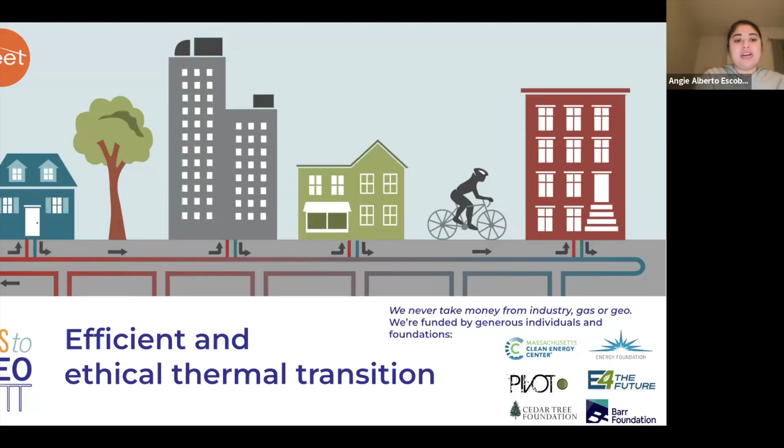I'm happy to share kind of the big picture of why gas to geo, and then some tangible actions that perhaps your community can take, but happy to answer any questions about the Framingham project or any of our work as well.

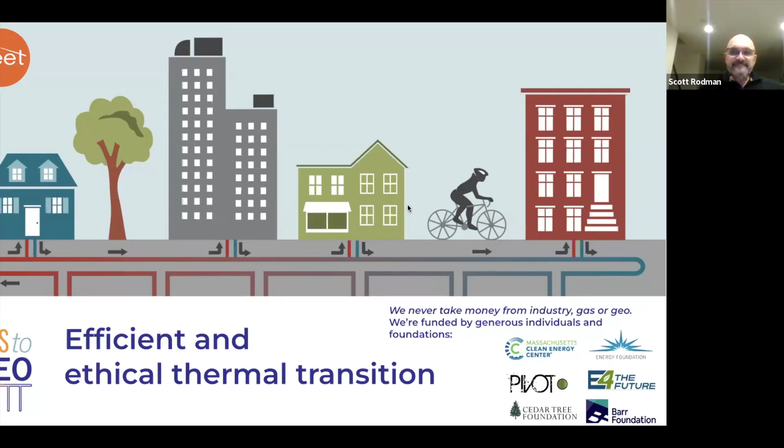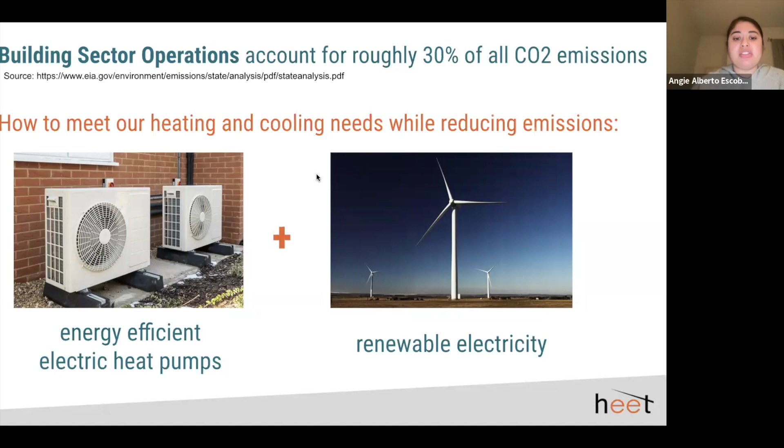So just to set the stage here, it's important to note that our building stock, our current building stock, is a huge source of emissions, and our current strategy for decarbonizing those building sector operations is to meet our heating and cooling needs with electric appliances, and having those electric appliances be supplied by renewable electricity. This is the dominant strategy not just in Massachusetts building electrification or beneficial electrification plans, but even beyond Massachusetts, New York, and other states, you see this as a dominant strategy.

So it begs the question, at least for HEET, what effect will this electrification have on our electric grid and on electric peaks in particular, which drive the cost of energy? So today we have a summer peak in the summer when most people's electric air conditioning appliances come on. But what will the peak look like when we shift our currently fossil fuel powered heating systems over to electricity? And so that's the question that HEET started exploring.

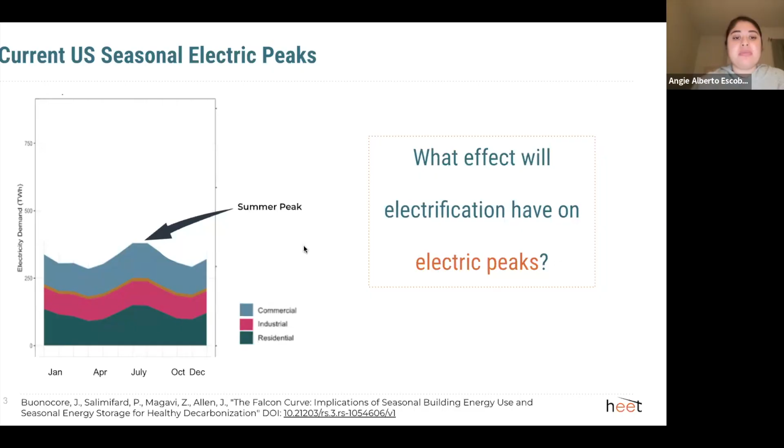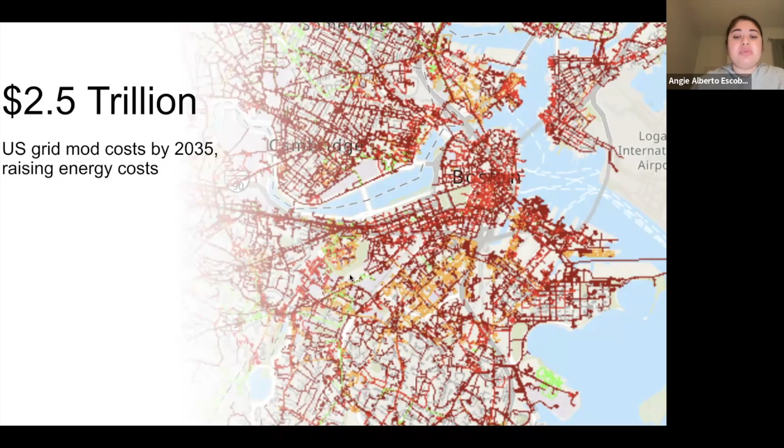This is a staggering number, $2.5 trillion in the next 10 years just to upgrade or modernize our grid in the US. This reflects back in ratepayer energy bills, right? Like we are funding these investments in the electric grid. And so we see this as a staggering societal problem, the amount of investment required in order to meet folks' energy needs and what that will mean for people's everyday affordability, energy affordability.

This report was published in December of 2023 by Oak Ridge National Lab. It showed that compared to the most popular technology for building electrification, air source heat pumps, when you compare a mass deployment strategy of air source heat pumps electrifying a vast majority of our building stock in the US, to ground source heat pumps serving the same function, you can actually save not just lots of infrastructure upgrades on our electric system on the transmission and distribution side, but that translates to real cost savings as well. If you go with a low operational energy technology like a ground source heat pump that has a significantly higher coefficient of performance, this study showed that it would cost 30% less to decarbonize the grid through individual ground source heat pumps, which is incredible and something to pay attention to.

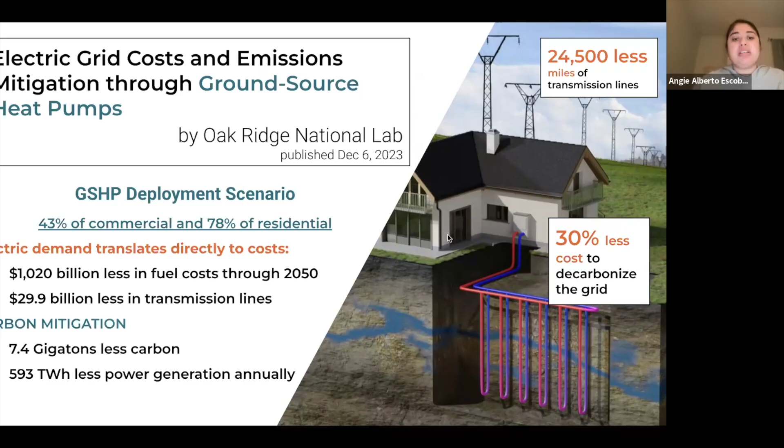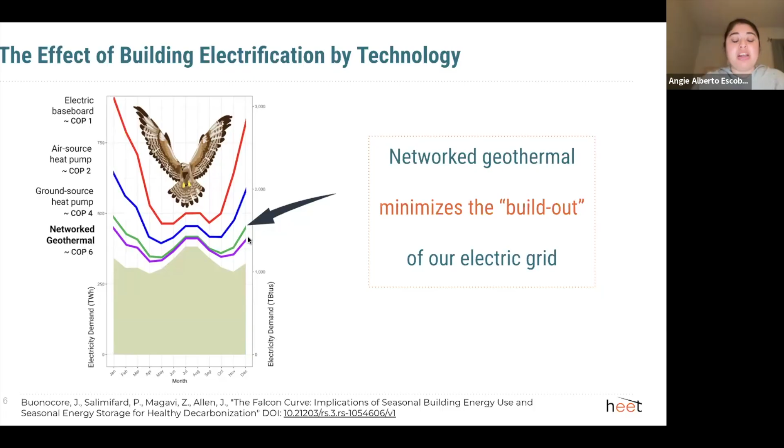As you see, COP, or coefficient of performance, essentially the efficiency of the technology increases. Air source heat pumps have a COP of 2, ground source heat pumps have a COP of 4. As that COP increases, that peak starts to lower, the wings of the Falcon start to lower. A case study in Colorado gave us a COP for a networked geothermal system, or a networked ground source heat pump system, with a COP around 6. And so that could decrease the amount of infrastructure and really minimize the amount we need to build if this were the dominant technology used to electrify our buildings.

So the message I really want to drive home here is that efficiency of the technologies we use, especially electric technologies and electric appliances, really does matter. Efficiency matters. At the same time, related to our work in methane, we and most climate advocates know that methane is an incredibly potent greenhouse gas.

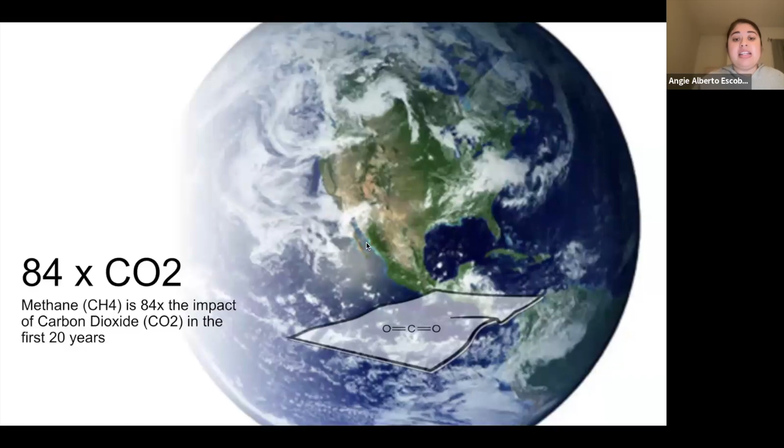In our state, this is the amount of infrastructure work that is required over the span of 5 years, from 2022 to 2027. This is a snapshot of the infrastructure work due to the leaky, aging gas system that exists in Massachusetts, which is frankly just aging. We're aging out our infrastructure, and it's going to cost us $1.4 trillion by 2050, according to a research economist, Dorie Seavey, who ran the numbers.

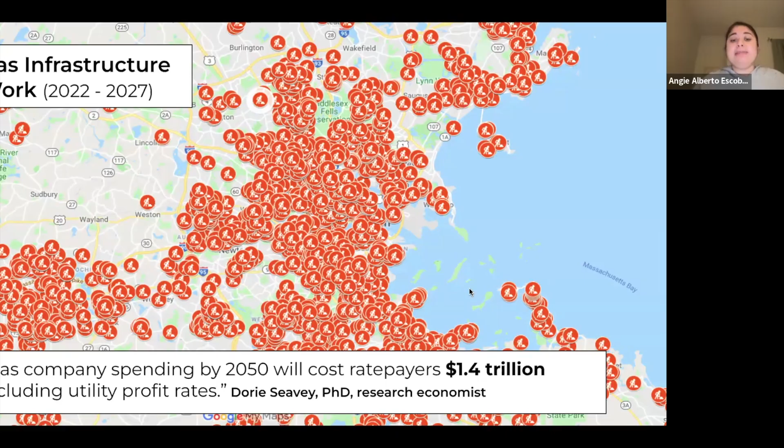And we know that these gas leaks, no matter how big, the biggest ones are the ones to target first. That's some work we've been doing. You can check out our gas leaks maps on our HEET website. Those are the ones to target first, but really all of these leaks in aggregate are contributing to climate change. We need to find a way to have plug-and-play solutions that can wean us off the gas system, so that we have less dependence and can minimize gas leaks in the future and minimize the amount of methane in the atmosphere.

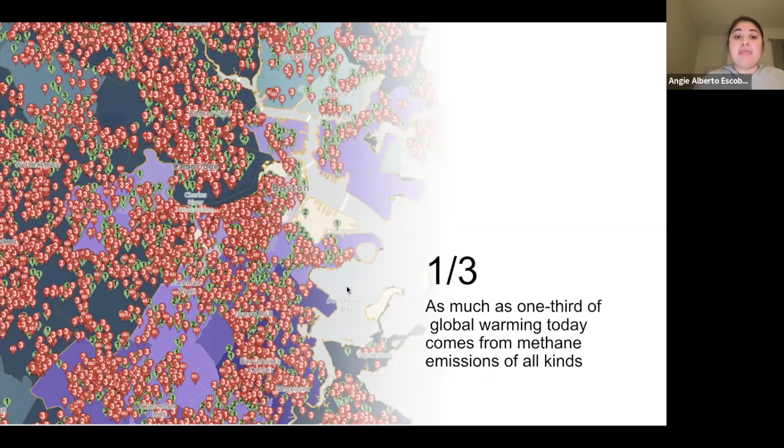So as we're investing millions of dollars in our gas system, people are still electrifying. People are leaving the gas system actively. If you take a look at this figure on the right, air source heat pumps have outsold gas furnaces and continue to outpace the sale of gas furnaces, which results in a house-by-house approach to electrification, right? What some folks may call an unmanaged electrification strategy.

We don't know when people are making these decisions. They just are—they decide one day, or their current system ages out and they have to replace it. But there is no coordinated effort necessarily to this electrification. It's really a house-by-house approach.

And the challenge here is who is left on the gas system with a decreasing rate base are likely folks that are renters and don't have a say on what type of heating system they have in their home, or are low-income folks who just have to go with the cheapest option, or maybe just aren't informed about the options that exist for retrofitting a home to be electrified. So this is really a big challenge in our energy transition—ensuring that as we're transitioning, it is equitable and we're not leaving folks behind in what we call the last grandma problem.

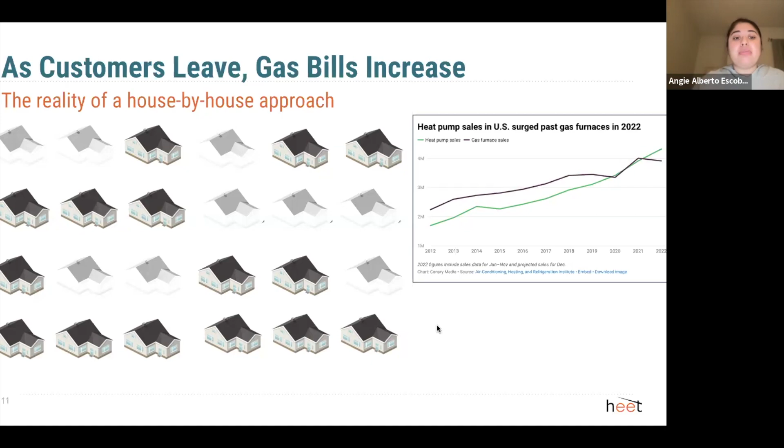So through these challenges that we've mapped out, HEET engaged with many stakeholders on the challenges and came up with this possible solution. What if we use the right of way that the gas system currently has, use the expertise of laying pipe in the street, and simply change the energy transfer medium from gas to water.

And so a geothermal network is very similar to the gas system. It has a distribution pipe that runs down the right of way of the street, and service lines that go to each building. And kind of like the gas system, where you have a gas furnace in your home, you would have a heat pump in your home that is supplied with water from this distribution loop. And so this is what we call a geothermal network.

It's a solution that came together over many charrettes, what we call community charrettes or stakeholder meetings, to help find a solution or technology that can multi-solve for many of these societal problems we're seeing. So this system is a closed loop system, so it doesn't have any contamination issues. Usually the energy transfer medium is plain water with some glycol or antifreeze in it. The percentage changes depending on who is engineering the system and how comfortable they are with having minimal amounts of glycol, but it's a very environmentally friendly material used within the pipes, and it is a closed system.

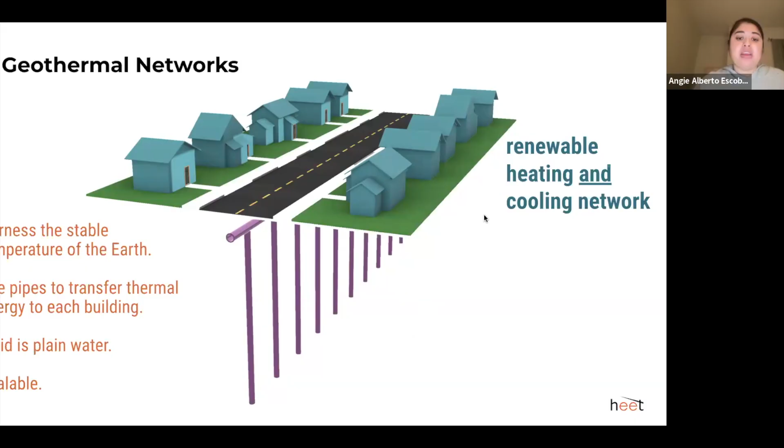And this system would provide renewable heating and cooling, and require a minimal amount of electricity. So what HEET has proposed, in order to maintain a stable rate base and not leave folks behind, is: what if a gas utility—with the expertise of putting pipe in the street, managing thermal energy, having that customer relationship already, that billing relationship, and that long-standing trust of being able to supply them with their energy needs—what if those utilities were to install these systems and provide energy across an entire neighborhood, renewable thermal across an entire neighborhood at a time, no matter the income level or whether they're renters or owners, but just provide thermal service down a cul-de-sac, let's say.

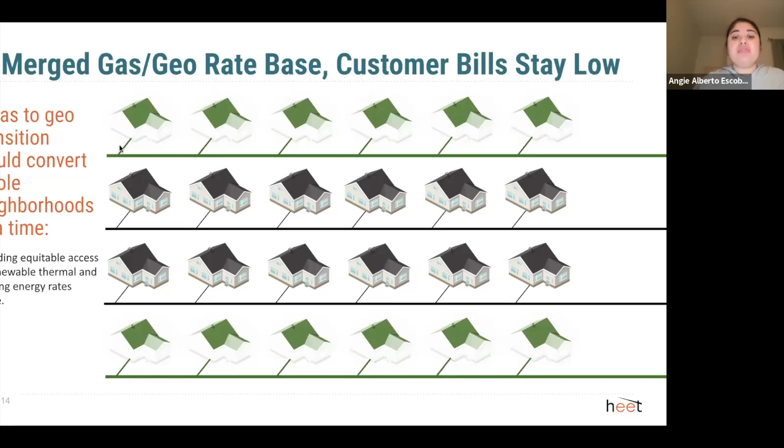So I wanted to clarify when I say geothermal network that folks aren't thinking of other geothermal technologies, because this is a very common misconception. We're not talking about a deep geo district that uses hot water, brings it up to a central plant, and distributes the appropriate temperature around a hot water loop. That is very common in Europe, Scandinavia, places where they have really high heating loads. This makes a lot of sense, but there are a lot of efficiency losses along the system when using that temperature. We're also not talking about geopower, or geothermal for electricity, which goes even deeper and produces extremely high temperatures that turn a turbine to produce electricity.

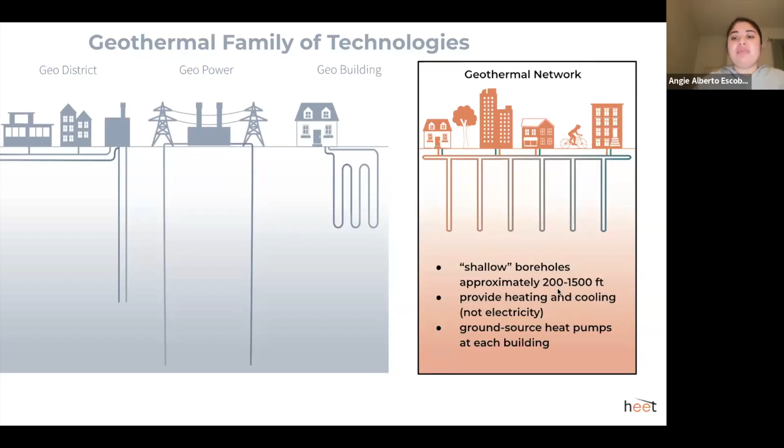What we're talking about is closer to just an individual building with a geothermal system, or a ground source heat pump at the building with some sort of geo exchange underground or in a pond in their backyard. We're talking closer to this technology, except the infrastructure is in a shared location along the distribution loop, and there is a distribution loop connecting buildings to each other. So this is considered shallow geothermal—only up to around 1,500 feet is really the deepest you'll go for a geothermal exchange system like this. This does not provide electricity; actually you're using electricity at the building level, but it's highly efficient, and I'll tell you why.

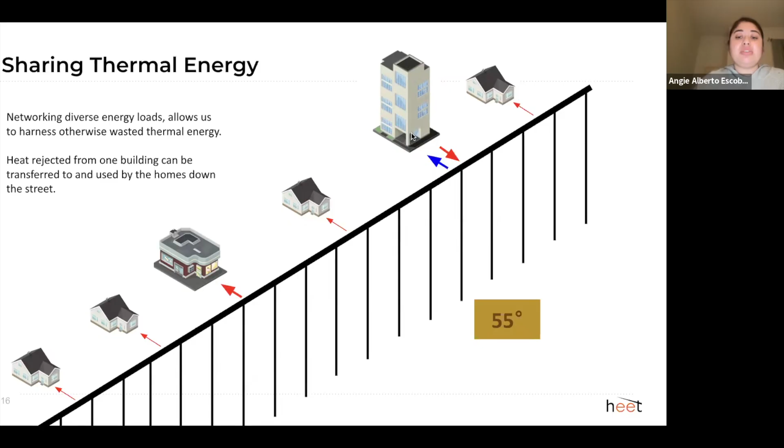So this shared loop—people sometimes ask why even install it, why not just do individual geothermal? Well, there are interesting properties when you put in this shared loop that make the economics worth it. When you target a location with mixed energy use, there might be a building that, even in winter, because of its occupancy and machines, might still need to be cooled. The ambient temperature loop can harness the waste heat from that heat pump: as it's cooling the building, it rejects heat, pulling it out and placing it into this shared loop. That loop, which also has service lines to other buildings, can then supply that warmer temperature—likely closer to what those buildings want in winter—making the heat pump work more efficiently and minimizing energy costs for folks on the loop. And if those folks were compensated for that waste heat, they could benefit from this too.

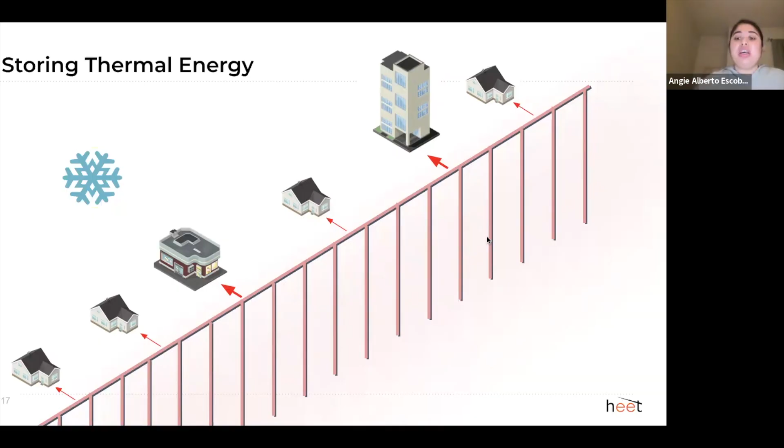With geothermal bores, these vertical loops pictured here—in Massachusetts we have great bedrock, which holds a lot of heat, so we can actually store thermal energy across seasons. Say in the summer, we can dump our heat into the ground and pull it out in the winter. This is true over an annual scale, but also over smaller time scales, allowing you to store energy across the year—think of the shoulder seasons.

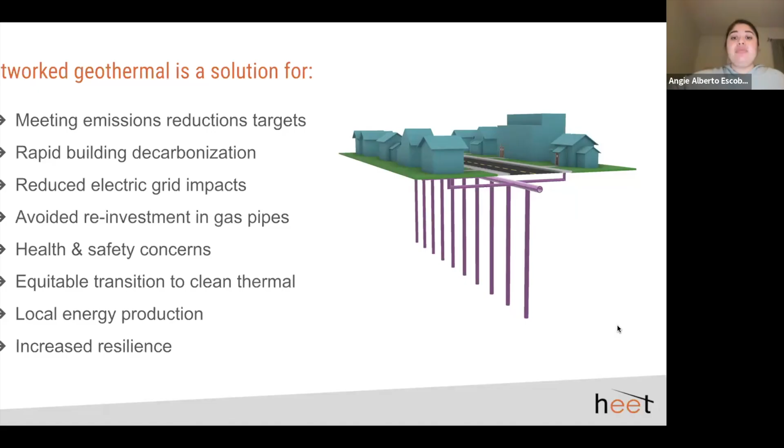So really, HEET has been exploring and advocating for this technology because of its ability to multi-solve: meeting emissions reduction targets on a neighborhood or block-by-block basis rather than house by house, increasing the speed at which we meet these targets, and also because of the amazing electric grid impact of ground source heat pumps, as we saw with the Oak Ridge National Lab study. It's a great plug-and-play solution for avoiding investments in natural gas pipelines, because these systems can deliver the exact same thermal service, but can now also supply an additional thermal service—cooling in the summer—expanding the business model of the existing gas utility. By reducing combustion in homes, health and safety could increase with the decommissioning of gas, and for the reasons of equity I mentioned, it's also local energy production—hyper-local. You have the bores or local thermal sources right around your neighborhood. That's the idea: harnessing what's already around us for increased resilience, so we're not depending on fuel shipped from far away.

And so I want to mention that this is kind of the progress to date. There's a lot of utility interest across the nation. There is a quarterly utility network geothermal collaborative that meets to explore the topic, that we're active participants in.

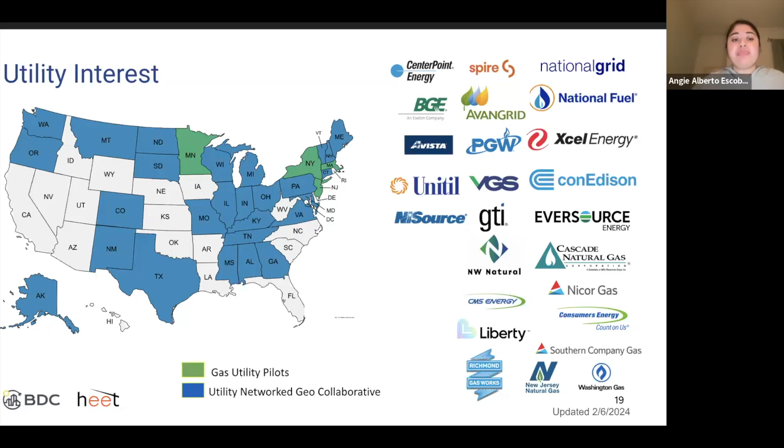The reason that drove us towards the gas utility, besides needing to solve for the gas system issue in Massachusetts, is because of an additional equity concern, which is a just transition for the gas workers currently. They are necessary, they are vital to steward us away from the gas system. There's so much institutional knowledge within the gas workforce that are actually out there repairing pipe, putting pipe down, that will be necessary in order to steward us into a clean energy future.

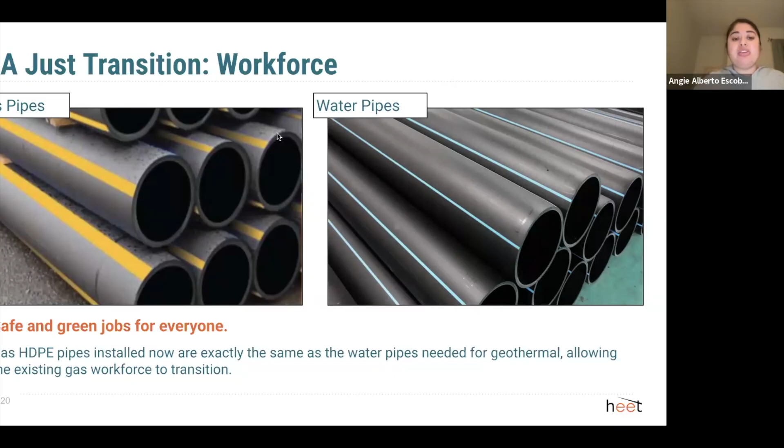Being able to have a technology that can harness all of those skills - the pipes that are put in for geothermal systems today are made out of HDPE, which is a material that is already used in the gas workforce today when they're repairing new pipe, putting new pipe in. So in the Framingham, Massachusetts pilot that happened recently, here's some photos from that. It was actually the gas workforce that was putting in that geothermal pipe. It was the same foreman that was, a week before, working on a gas project. He was working on a geo project the following week. So it's pretty interesting how seamless it was in this pilot, the workforce transition piece.

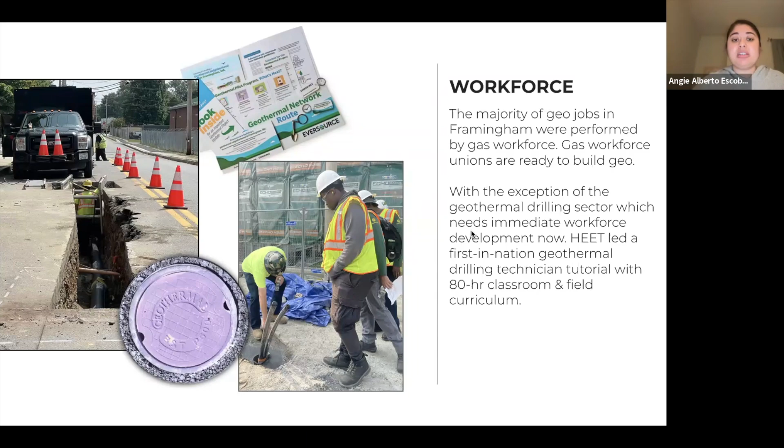Really, HEET's work today lies in building out a project pipeline. So we've worked at the legislative level and are working within the regulatory space in Massachusetts, and nationally really, to set the enabling conditions for gas utilities to be able to do this work, decarbonize their business model on this large scale. But also, my organization recognizes that we need to set enabling conditions at the local level as well.

It means a lot of stakeholder assessments, really putting our ear to the ground to what people think about geothermal, informing them, educating them about the potential benefits if they were to be a participant of a loop, etc. But also unlocking the local data that exists at the local level already. There are already many neighborhood scale electrification pilots going on where people are being encouraged to decarbonize now. And that includes maybe their gas stove, setting them up for success by upgrading their electric panels or doing weatherization early on. So we really wanted to share that information back to the state in a centralized way.

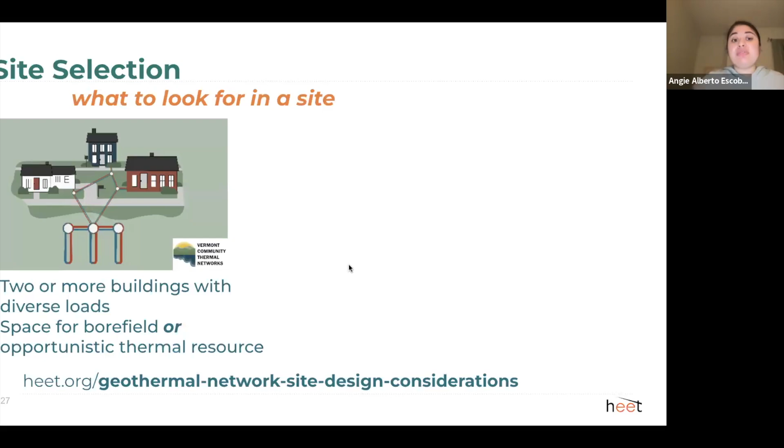For anyone here that wants to think through what to look for in their community, I wanted to share quickly one of the resources we have in our HEET toolkit, which can be found on our website. heet.org/gas-to-geo-transition, with dashes instead of spaces, will take you to a toolkit with a number of resources, one of which is a site selection criteria, a quick checklist of what you want to look for in a site.

One of the first things we talk about to communities is you really want to harness any opportunistic thermal resources if you have them nearby. What does this mean? Any buildings or facilities that might have a lot of waste heat that can be harnessed by a network geothermal system. Think ice rinks, hospitals, breweries, even a data center can be used to heat other buildings if it's close enough in proximity. What you really want in a site is density.

You want diversity and density. A lot of folks are interested in doing rural applications - it can be done, it will look a little different. The economics really work best when you have urban density and good load diversity, meaning you have commercial buildings and residential buildings all in the same place.

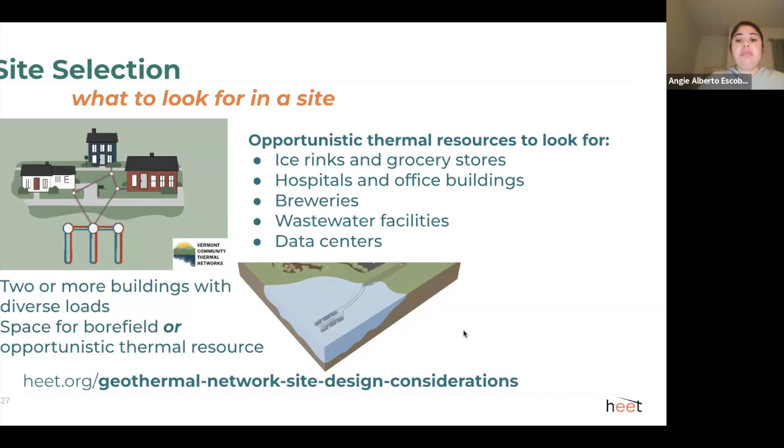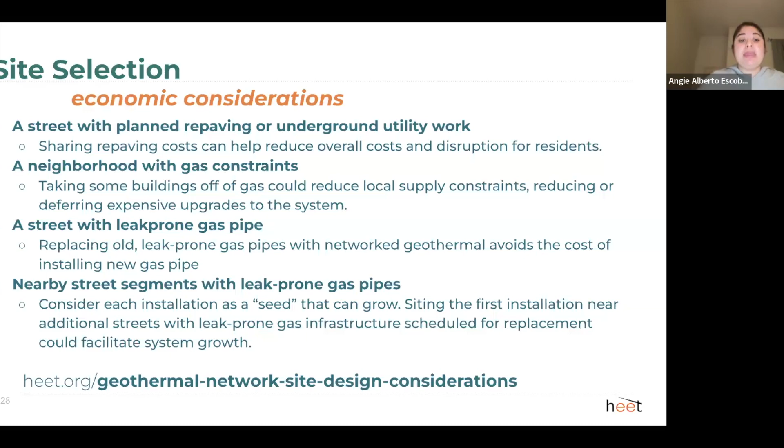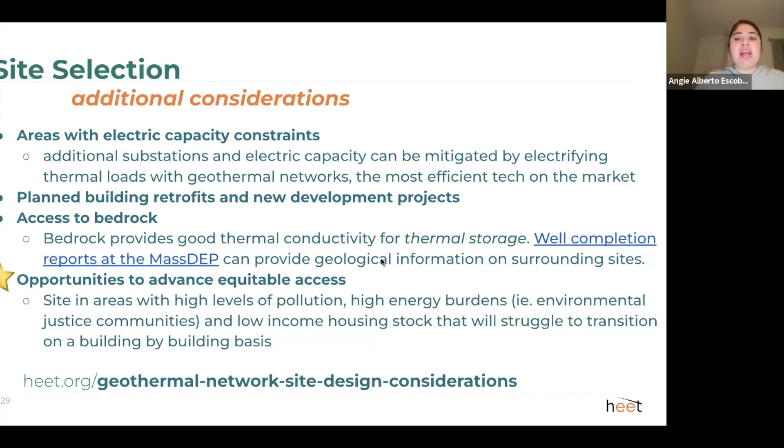I mentioned electric resistance heating as a good opportunity to target. This is especially great if there are already electric capacity constraints in that area. You could free up electric capacity by moving from a low COP technology to a high COP technology like a geothermal network. There are also additional resources and considerations, but happy to move forward and share this opportunity.

The Mass DEP currently has a wastewater energy recovery pilot grant program out. They are accepting applications on a rolling basis, essentially until they run out. I wanted to share the opportunity because it's a unique one we're seeing right now that has multiple tiers of funding for this type of work.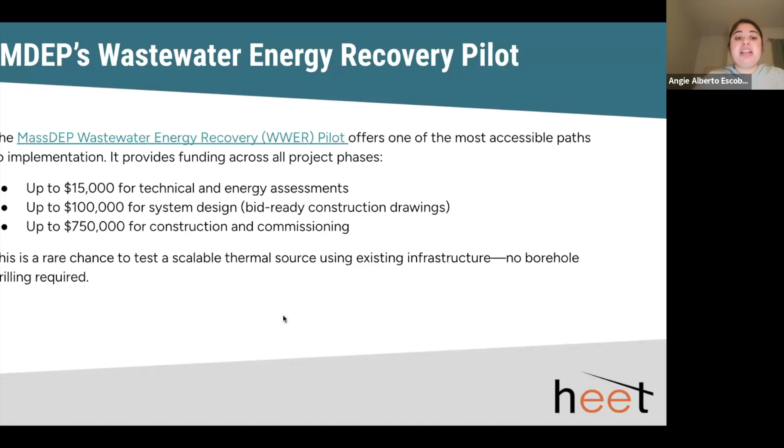Wastewater energy is a great opportunistic thermal resource. You're recovering energy from an already existing waste stream, and you're able to lower the capital cost of a project compared to geothermal boreholes because of the high cost of drilling. So this is a great program to go for if this is of interest, and HEET is happy to support any applications folks are interested in going after.

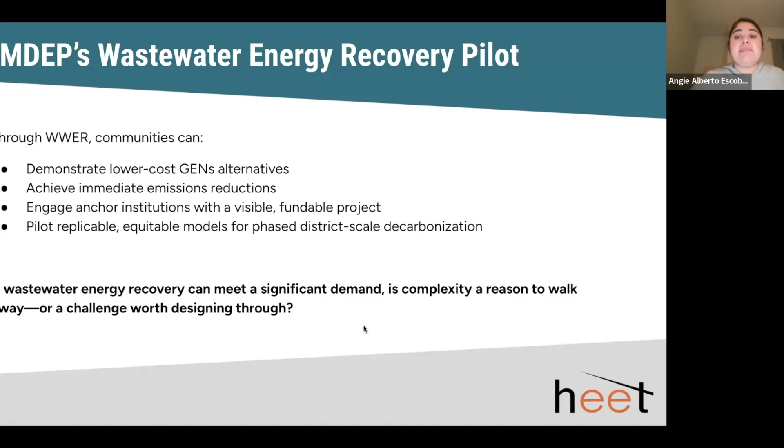I will pause there and just say again that there are plenty of resources and many branches we could go off into in conversation. I really welcome each and every one of you on the call today to reach out to me if you're interested in championing this technology in your community.

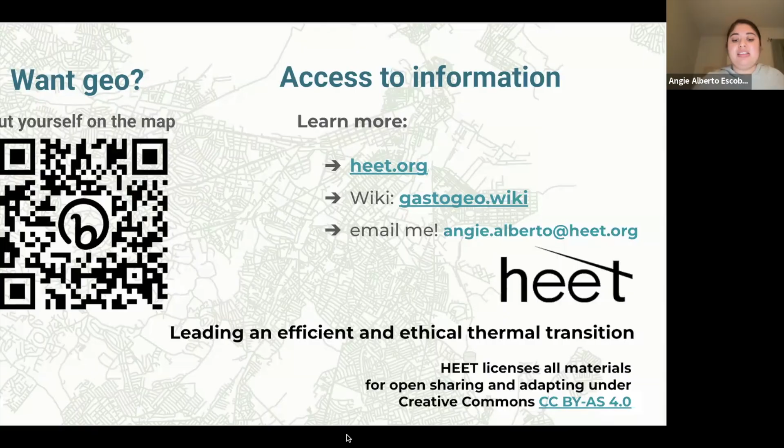Can you just discuss - there's been a lot of questions about geothermal versus ground source heat pump and understanding the wording there. Can you just take a minute on that? I think that's been asked by a couple people.

Yeah, sure. So geothermal is like the last name of a family of technologies, all the technologies that I showed. And a ground source heat pump really refers to the appliance itself. The ground source heat pump is an appliance connected to some sort of closed loop water system that transfers energy into the home through a heat exchanger.

A ground source heat pump can be connected to various types of distribution systems, like a hydronic system in the home for heating, or a forced air system. So that would be called a water to water or a water to air system, respectively. That's how I would describe the difference.

Eric asked a question about the ORNL study text, which says 43% of commercial and 78% of residential. Is that CapEx or OpEx, and is that of GSHP versus ASHP? Can you clarify that sentence?